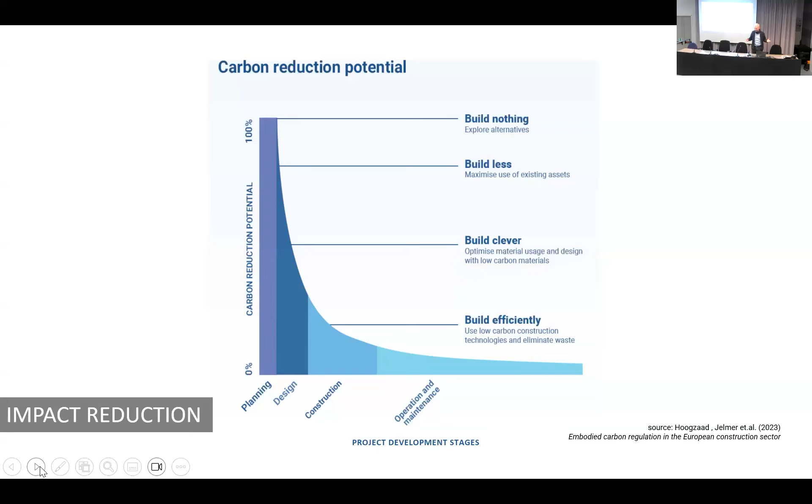The last statement here says, build efficiently and especially use low carbon constructions. And so this brings us into our issue for tonight, because raw earth building is a low carbon solution. But we have some other materials that I will quickly mention. We can perhaps use things considered scraps from other processes. They can be resources for ours. And so we get a bit into the issue of circular economy. I think you're familiar with this. Don't need to speak too much about it.

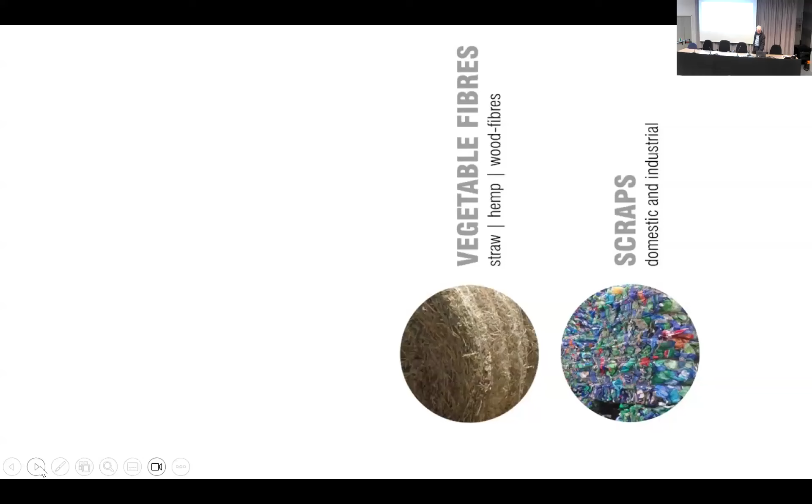But if we go into the realm of natural materials, we can quote vegetable fibers as straw, hemp, or wood fibers that we can use in many different ways. We have vegetable rods. They are different from the fibers. The fibers are very small, and we have to invent solutions to use them, while the vegetable rods can already be considered in some contexts as building elements. We will see this later, so I think Lisa will also talk about this. So bamboo, giant reed, and branches from other woods can be used in this category.

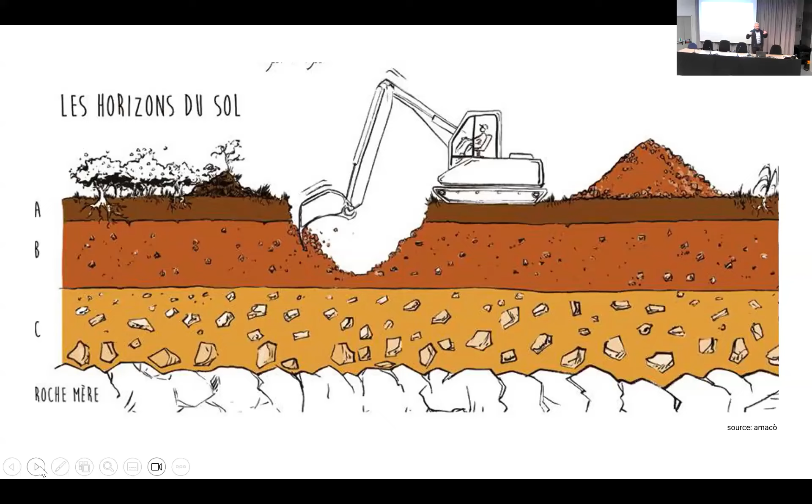And then we have raw earth, and we will see this a bit more in detail. What do I mean when I talk about raw earth? When we source raw earth for building purpose, we normally choose a layer which is underneath the vegetable layer. So the earth that we use to cultivate is the humus layer. This is not suitable for building purpose. We use the second layer. So normally we say between 50 and 60 centimeters below ground.

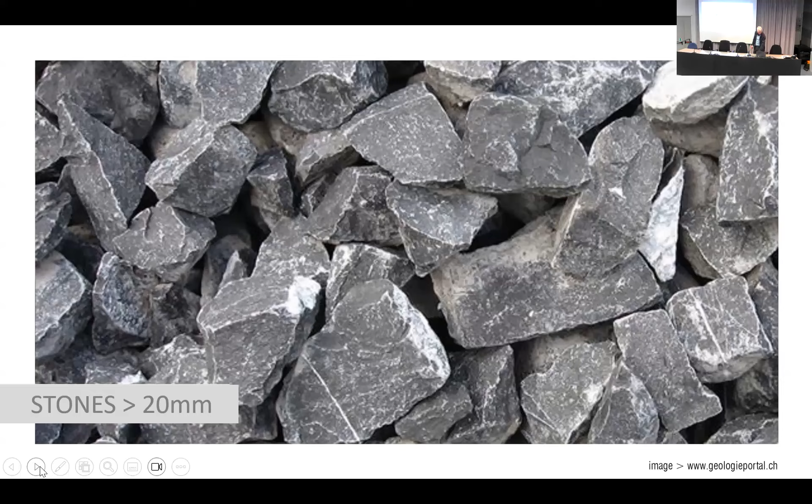And what can we find in this level? We can find stones, and we refer to stones when we talk about mineral products that have a diameter of more than 20 millimeters. So roughly said, these are stones for us. Then we can have gravel. It's a bit the same, but smaller. We can have sand, even smaller. Or we can have silt. This is so small that we can't look at the single grains, but it has its importance in our blend.

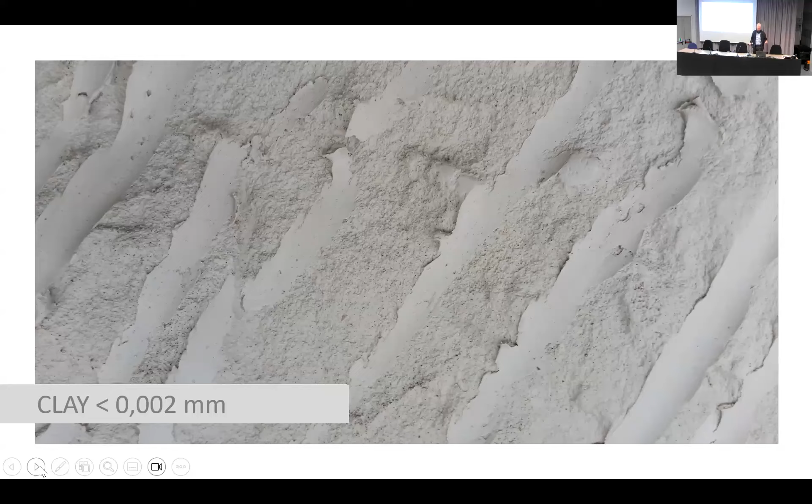And we have clay. The clay particles cannot be seen but by a microscope. They are really, really small. And they have another particularity, which is important to know. I didn't perhaps mention, all of these can be found in earth blends. So all the earths that we will look at tonight will be blends of different shares of these materials. But there's a very important difference. If we look at the first 4 categories, from stones to silt, even if we look with a microscope at silt, we will recognize them as spherical grains. So similar to spheres, not really, but similar.

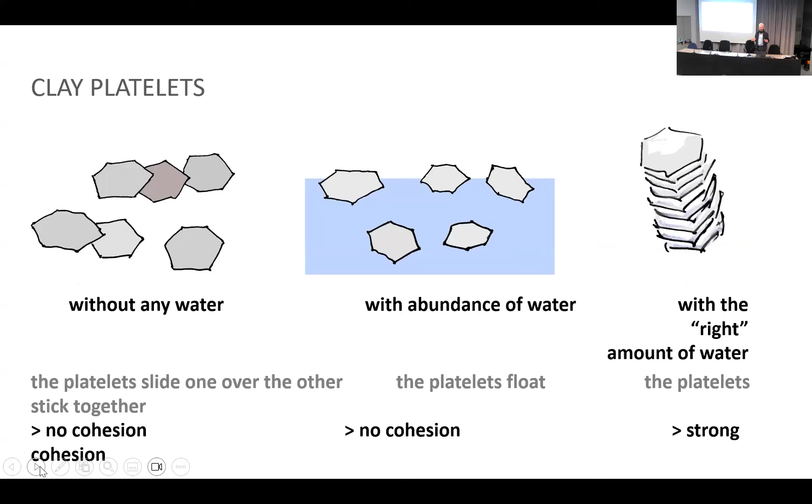Okay, I go ahead, but you can test this, because that's actually the magic of how raw earth works as a material. The important thing is that this cohesion that we have between the clay platelets has the capacity of binding even larger elements. So you can imagine the picture here on the right as 3 little clay platelets that hold a very, very big sand grain, because it's on the microscope. The clay platelets are really very small.

And so this is actually what happens, and what makes raw earth rely on a physical bond. This makes the difference to concrete, for example, where the concrete binders undergo a chemical transformation when they dry, and so they are not reversible, while raw earth can be reversible. I can still add water, and I can re-loosen these bonds, which is a risk because I have to take some care when I build with this, but it's also an opportunity because I can bring the material back to its original shape and start the process from scratch, let's say.

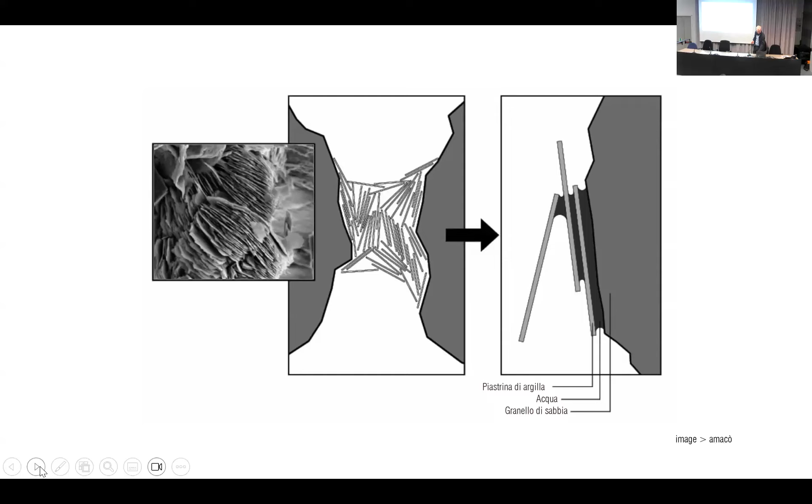So just one more word on how this works. The magic behind this process are capillary bridges. And if you had the platelet, you already felt this a little bit. So what happens? What does the water actually do with these 2 plates? It builds a capillary bridge. Capillary bridge means that the drop of water that I put between the 2 plates wants to have a certain shape, because that's a property that water has. It always wants to minimize the surface where it gets in contact with the air around.

And so if I do exactly the gesture that you are doing with the platelets, so I bring a distance between them, then this shape of water changes, and the tendency of the water is at a certain point to make the process go back, so to bring the two platelets together again, unless, of course, I cut the bond. If I cut too much, then they separate. Is this clear? Yeah? Okay. So I wanted to explain this a bit in detail, because this is actually a very important aspect of building with raw earth.

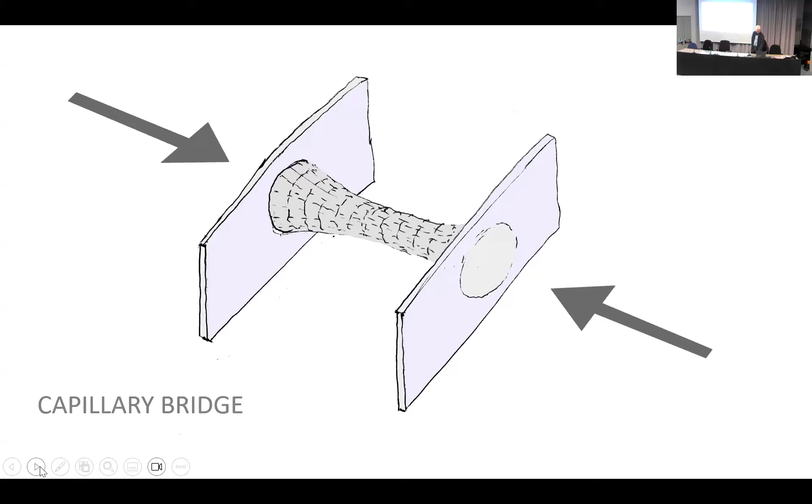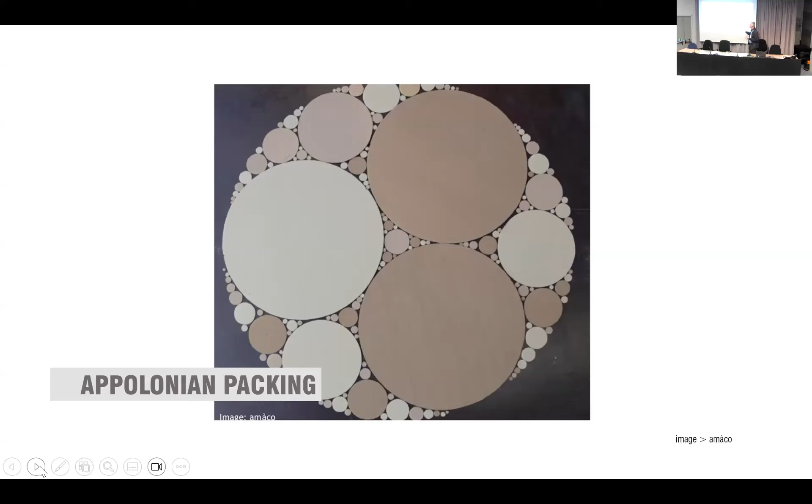It's reversibility. Another important aspect, I already told you about the grain sizes and the fact that raw earth is a blend. And here you can see what it means to have a good blend with many different diameters of grains. This means that we can pack the material. So we can start with large grains. We can close the little holes in between with smaller grains, with even smaller grains, and even smaller and smaller. And this gives a very compact material, okay? So here it is an abstract drawing, so it's very easy to get a really almost closed surface.

What we really have when we source raw earth, actually we can source it from the building ground. That's actually the dream of all raw earth constructors, since we have to build a foundation, we probably have to dig some earth, and we can test this earth. Perhaps it is suitable, then we are lucky enough, and we can use it. Why is it so important to test the earth before starting to build? Because each earth has different properties. The blend that I was talking about can be completely different. It can have a majority of stones, and perhaps there's no sand in it, or I can have a lot of clay and too small an amount of silt and whatever.

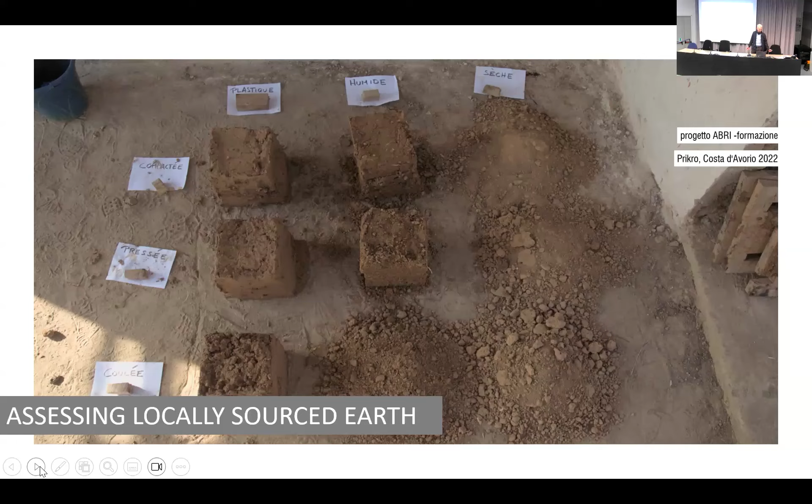So the important thing is really to make an assessment before starting to build. The good news is that there are very empirical and simple methods to do this assessment. The one you see here is called the test of Carazas. This is not important to remember, but it's one of very simple assessment methods. I don't go too deep into this, because otherwise we can talk about everything. The different kinds of earths can be shaped in different ways. And with this diagram, we refer to a classification made by CRAterre. CRAterre is probably the most important research center on raw earth building. Its headquarters is in Grenoble in France.

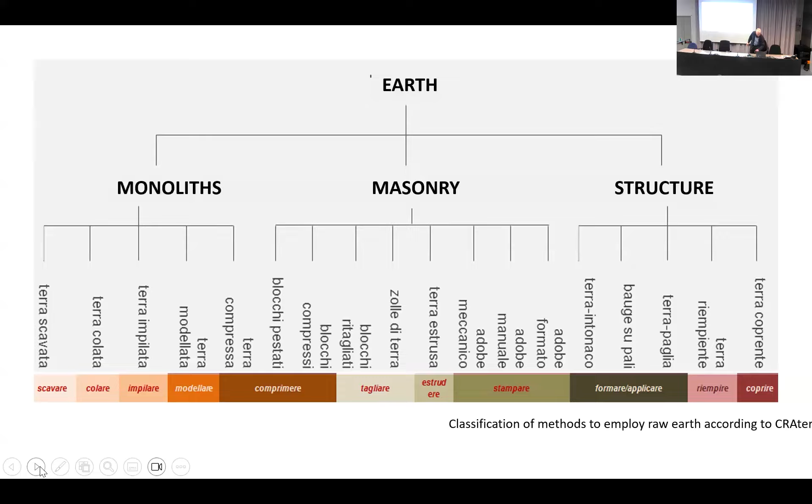And it's not important to go into each building method that they classified. The interesting thing is that they classify them according to the gestures that you do to build. So that's why you have, sorry for the Italian, these verbs here at the bottom. But what we can perhaps have a closer look at is that they can be divided into 3 big families. And we see this here. We have monolithic techniques. We have techniques that we can refer to as masonry, and we have structure.

While the monolithic techniques are those where, if I imagine to drill a hole through the wall, I will always find the same material from the beginning till the end. So in this sense, they are monolithic. Okay. And we can see applications of this. I will go quickly through these; I indicated the countries where these pictures are taken. So here it's Côte d'Ivoire. This is southern Germany.

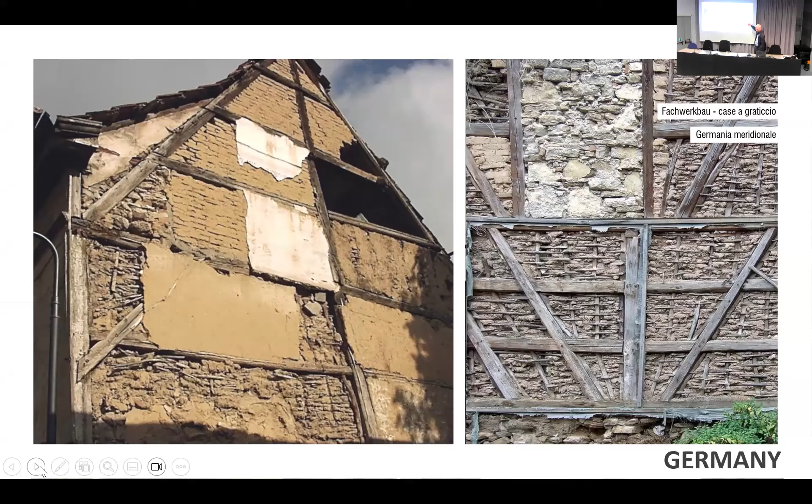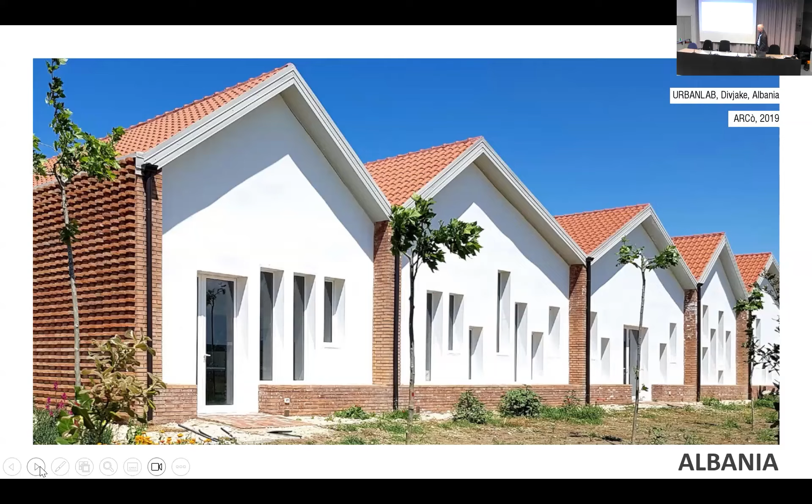But we can have modern buildings. This is the URBANLAB in Divjake in Albania, I don't know if I pronounced it right, by ARCò, an Italian design group. And if you look at a picture from the building site, you see it's made with the same technique. This is a traditional rural house from the early 20th century in central Italy, in the Abruzzo region.

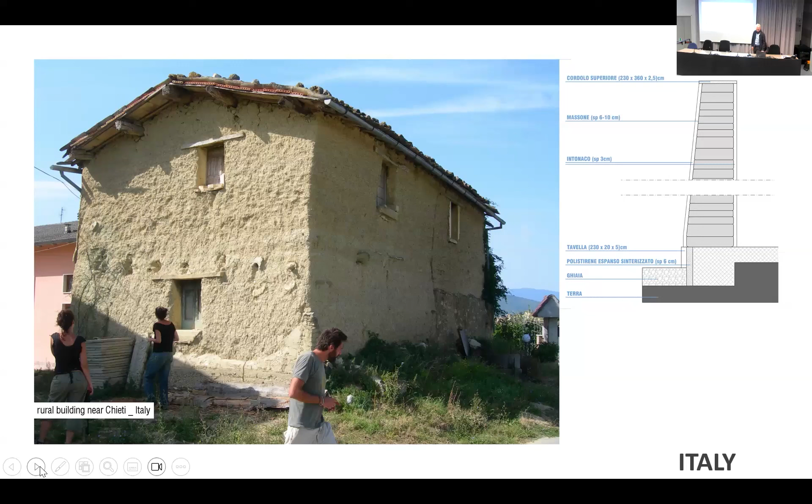When the air in the room becomes very humid, raw earth can absorb this, and so stabilize a bit the inner climate. When it gets dry again, raw earth can give this accumulated water away, and so really have a stabilizing function. The second purpose is acoustic, because it has quite a lot of mass, and so it can divide from one schoolroom to the other. It's a good acoustic insulation.

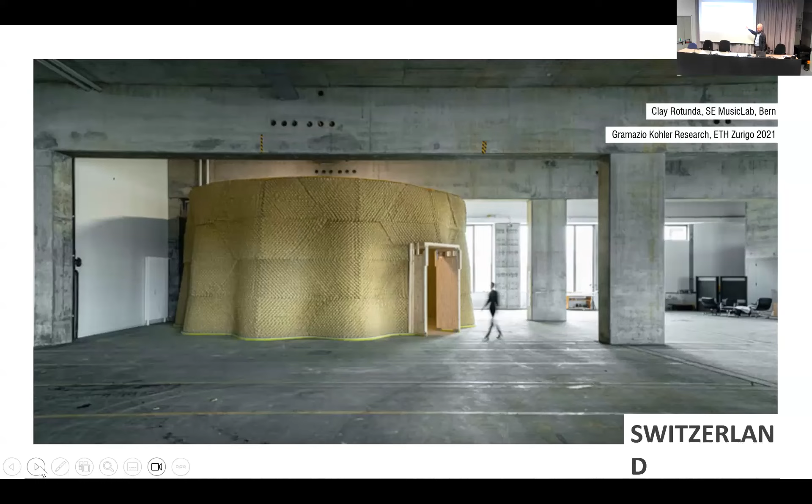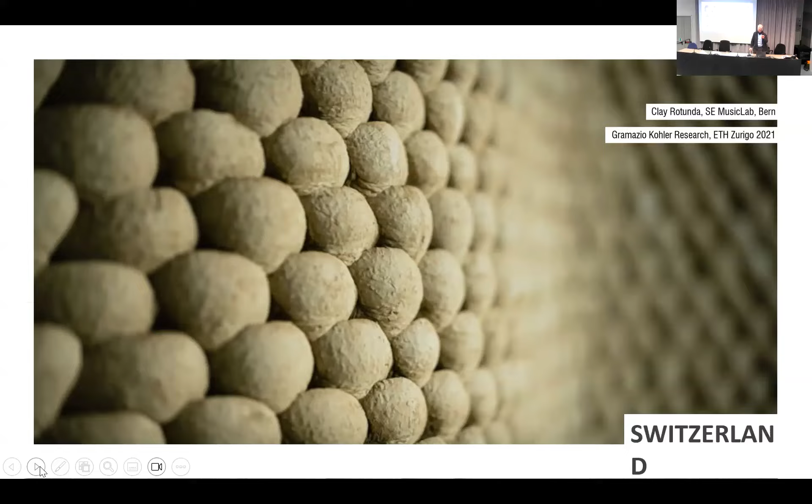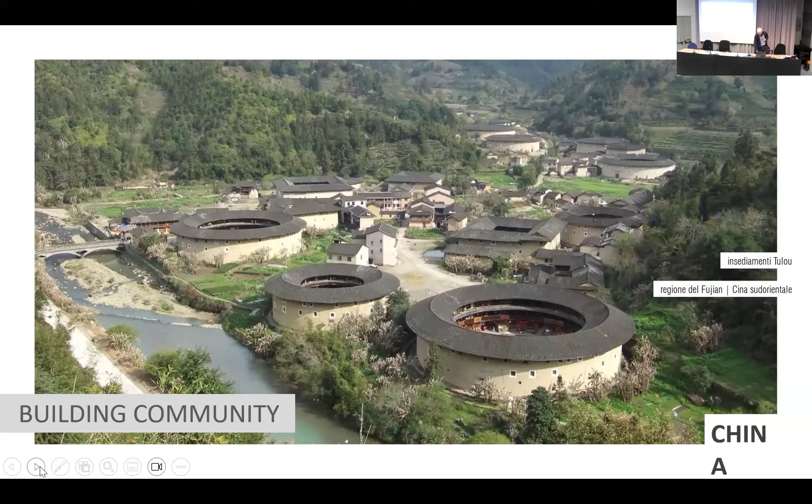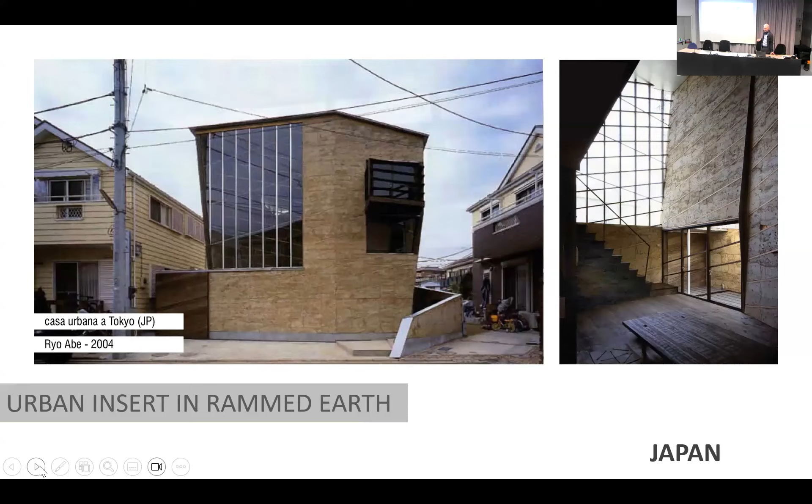But we can have earth buildings in metropolitan areas. Since the issue of tonight is urban building, I wanted to show you this also. And we can have it with a very modern look. This is a private house by Martin Rauch.

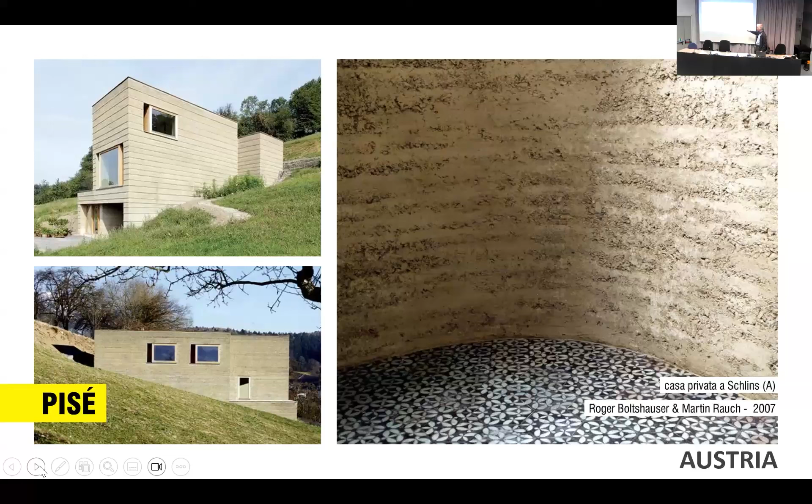Martin Rauch is not an architect, but he is actually a clay maker, and he then got this expertise to make consultancies for architects building with raw earth. And at a certain point, he asked one of these architects he used to collaborate with to design a house for himself, and he wanted it specifically modern with a flat roof, with this square design and so on.

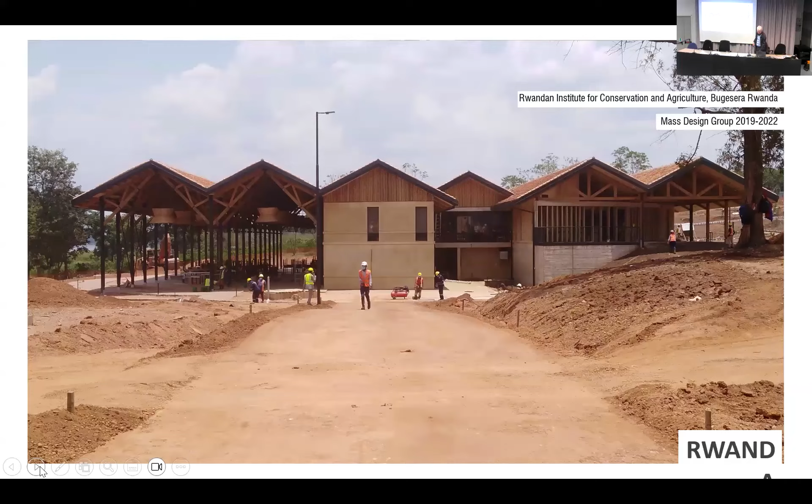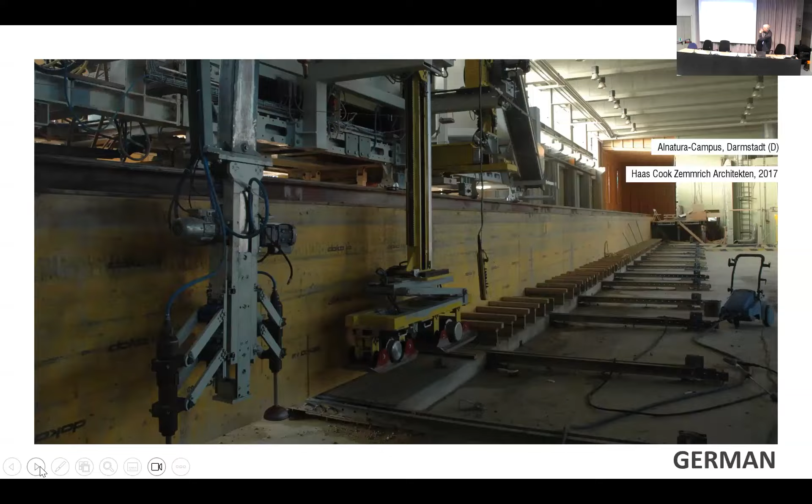The second board is missing, so you have to imagine this with a second yellow board, and then the earth is poured here inside, and these are the rammers. Two rammers like this, and again two rammers like this. And this whole train, imagine it like a train, floats on this system and builds the whole wall. This was important. The architects wanted this because they wanted these lines perfectly aligned. So what they did was actually build the whole wall and then cut it afterwards to be sure that the layers are really precise. Okay.

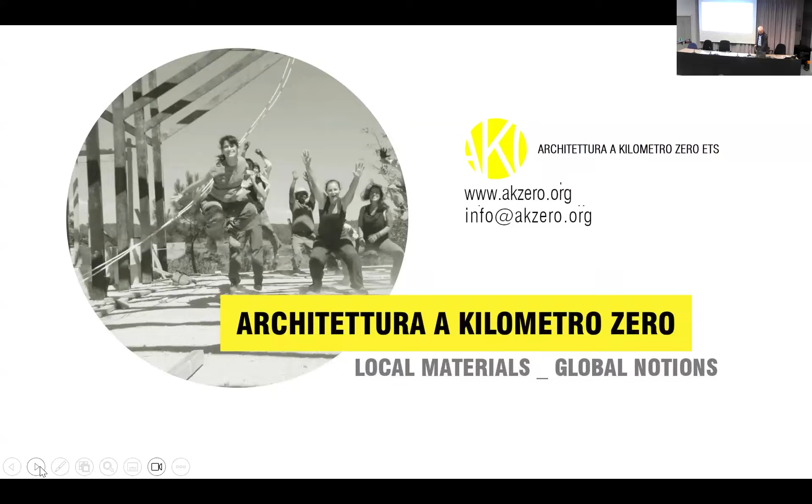Now I switch a little bit. I will spend a few words on the organization I'm part of. It's Architettura a Kilometro Zero, a small organization based in Rome, and I will tell you in a few words what we do. We have mainly three spheres of activity, and we like to call them with these words: build, learn, explore. Where build includes design. We do also design practice, or consultancy. We help other professionals to get their designs done if they need this specific expertise. And sometimes we also construct directly, and I will show you.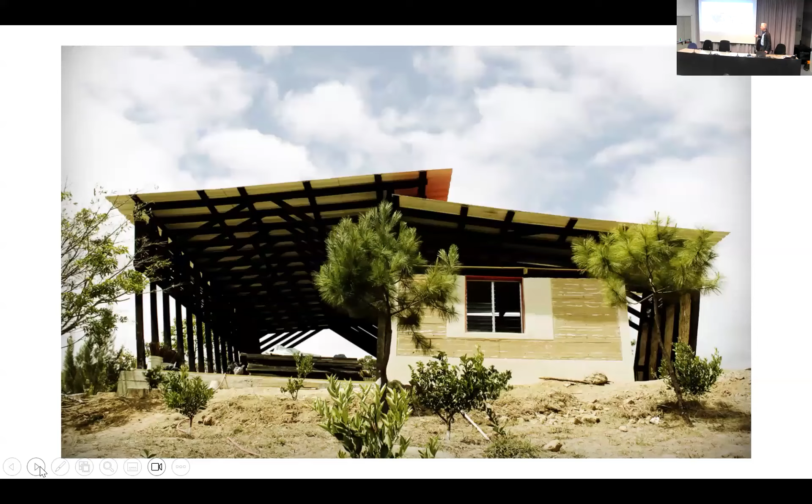This, for example, is a trade school in Guatemala. And here it was important to send a team directly on site, because we wanted to introduce building with raw earth. We thought that this would really make sense in this context, because the material was available. The stakeholders on site could be involved. They could help in the building site, but this only works if there's a presence of people from the design team who also have this expertise. And so it's a process of building together.

This was built in 2021, so we couldn't do that because we couldn't travel at that time due to the coronavirus crisis. And so we tried to do it anyhow with some video conferences on Zoom and telephone, and sending more drawings than we actually had foreseen. But in the end, more or less, it worked.

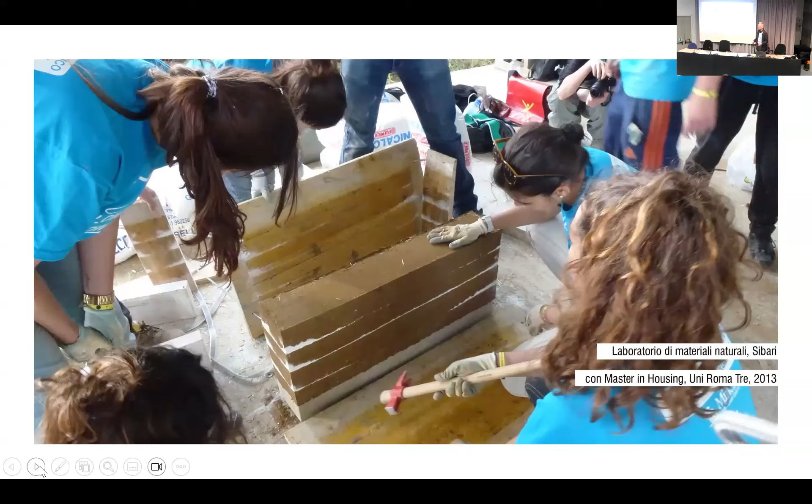And the training is normally a very active training. So it's learning by building, actually, experience. This is what we do mostly. And therefore we have a program, a 3-level program. So the first level is an introduction in the categories of building with vegetable rods like bamboo or giant reed.

And then we have the building with raw earth introduction. This is also building with raw earth, but we keep it separated as render, because this is the most simple application that you can do in a building process. If you don't dare to build a house completely in raw earth, at least you can give it a raw earth render, even in a metropolitan area like the center of Rome. This is possible, and we did it.

And then these are deeper applications, or more detailed courses on the same issues. And then actually the third level experience is the participation in one of these activities. It's more or less what Lisa did with us, spending 3 months in Western Africa.

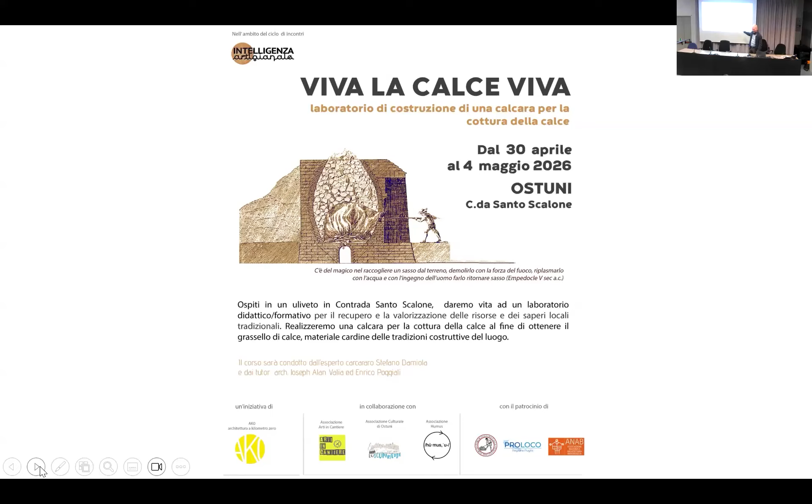And this is an information I got this morning from the organization. This will be the next workshop if someone from the floor here is interested in spending some days in Ostuni, in Puglia, also a very nice place to go to the beach. And this will be on lime, not on raw earth, but it's the next workshop by AK0.

So at a certain point, we tried to apply this workshop concept to Africa, and we had really good experiences with it, because the learning by building process is actually what works. The fact that you share the building site and you do it simply. And in this sense, raw earth is a very forgiving material, because you can easily repair errors. It's perfect for practical training. You can just start where you can, do it. And if it's not perfect, it can be done again. It's not a real problem.

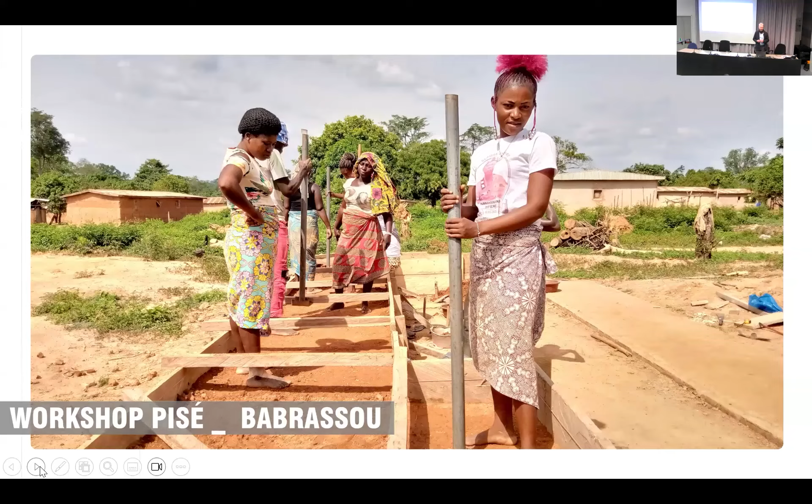In this case, it was the village of Babrassou, where we started such a training workshop. And we were really surprised, because those who participated were mainly women. And we didn't expect this, but it was nice.

Okay, and a few words on the Explore. This is a bit more the research aspects, research and experimentation. This includes very conventional things like energetic assessment of some buildings, where we investigate things like what can come from a raw earth render. Does this really improve the inner climate? Things like that. This is an issue that we are very interested in, prefabrication and self-construction. Can those two aspects go together?

Because self-construction is a very interesting social aspect. It means that those who build their home can bring their own resources, their own human resources into the process, not only in terms of labor, but also in terms of experience and knowing the building. This is something that I consider valuable, should be enhanced. But at the same time, we have to cope with norms. We have to cope with building codes and all of this.

And so perhaps it can be interesting to share the responsibility a bit, to have some part in prefabrication, that till a certain point we have a company that can perhaps build a good timber frame and bring it on the building site, and then we can do the finishes on our own. And so this is a bit behind this.

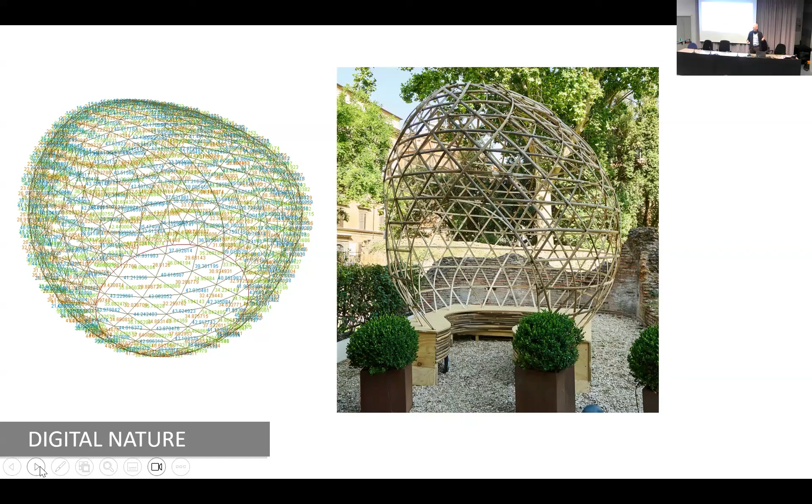Then, just to complete it, one aspect of our research is called digital nature. So here we are trying to understand what we can do if we use digital algorithms to control the design process, but with natural materials which are not homogeneous at all. So sometimes you have these figures that come very cleanly out of the computer software, but then you have to cope with a bamboo rod that has its nodes where it wants and not where we want. So this is sometimes a problem we have to bridge.

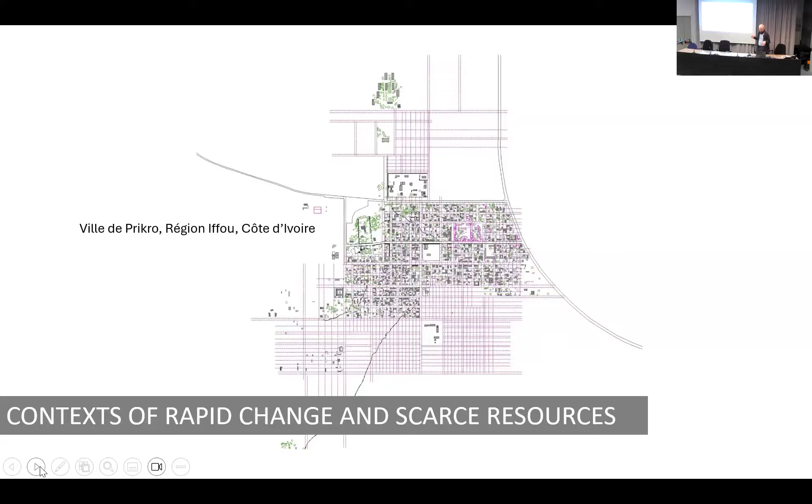Other investigations have a more urban character. This is the city of Prikro in Côte d'Ivoire again. This is a place that Lisa also knows very well. And it's a medium size city in central Côte d'Ivoire. It's more or less 10,000 inhabitants itself, but it's the center for a province of almost 100,000 people. And it's very fast growing, which is actually what is happening in a lot of African towns.

The UN Environment Program estimates that 70% of the African building stock that we expect to have in 2040 still has to be built. So we were interested in understanding how they will build, and whether we can somehow give some little hints, even if it's a process which is ongoing and very fast.

They have bamboo, not cultivations. They have bamboo available, but they have no notion of how to use it because it's not part of their tradition. So this is where an input of know-how can actually perhaps change something.

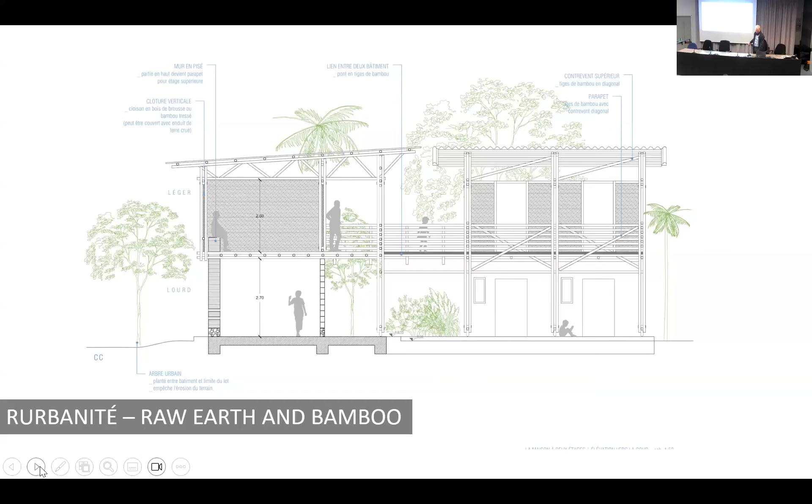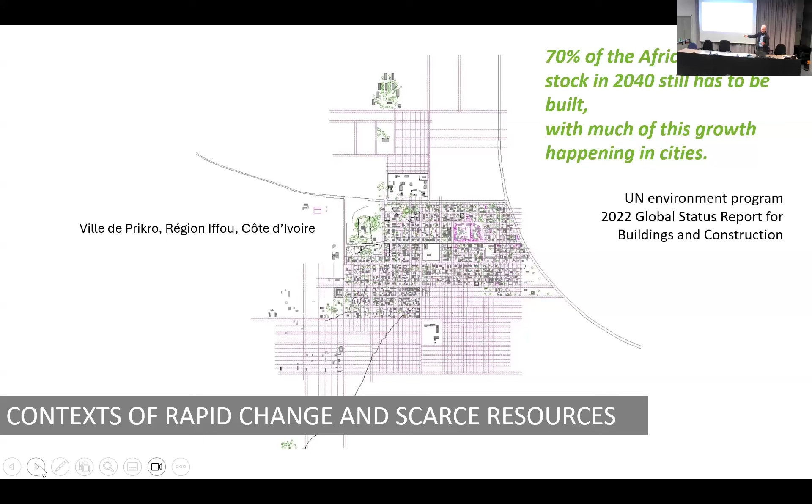I don't want to make this too long, but we then thought about different typologies. Is it only living, or is it living and economic activities like small shops or small workshops? And also how can it grow through the years? If the family grows, perhaps it can grow. And all of this is included in an urban pattern which is existing. I forgot to say this: what you see here are buildings that already exist, but the municipality already drew this endless pattern that goes along, and there will be new plots exactly that way.

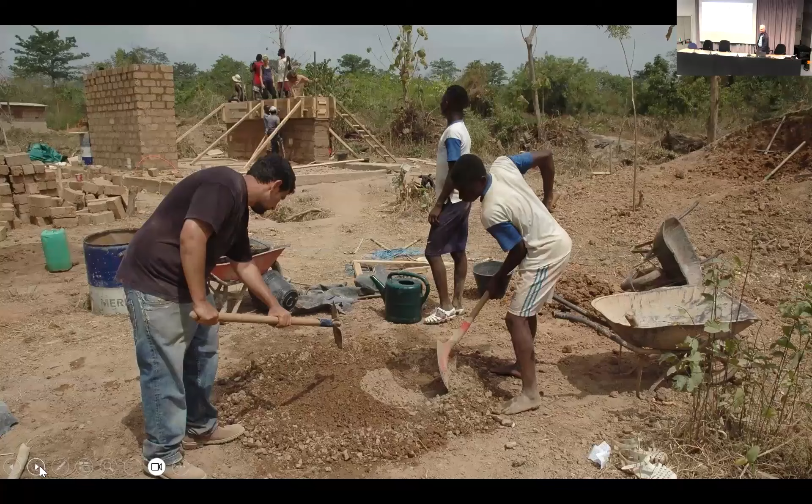So this is exactly what we did later with the program ABRI, which stands for Architecture et Bioconstruction pour l'Environnement Rural Ivoirien. So a specific program tailored for Central Ivory Coast. And we started this with a workshop in collaboration with Roma Tre University. They came to Prikro in 2019. And then this went a long way. You will probably see this photo again.

But this is just to say that the last output of this program is a process that we did in four different sites. So after doing the program in Prikro, which is here, we extended it to four other localities. And our partners on site are an association called Eau et Miel, so water and honey, because they are mainly beekeepers, and they also have this other program aspect with water. But what they needed were buildings for their beekeeping activity. This differs a bit from site to site. Sometimes it's only a place where they can store their equipment. Sometimes it's really a larger building where they can also do training activities.

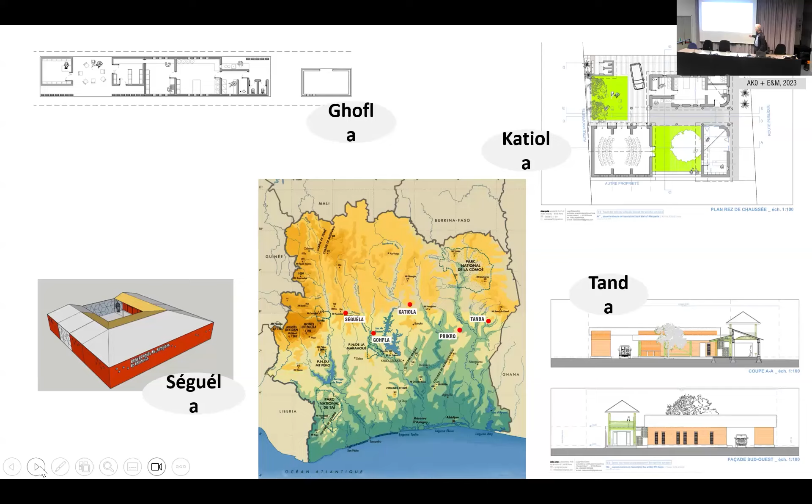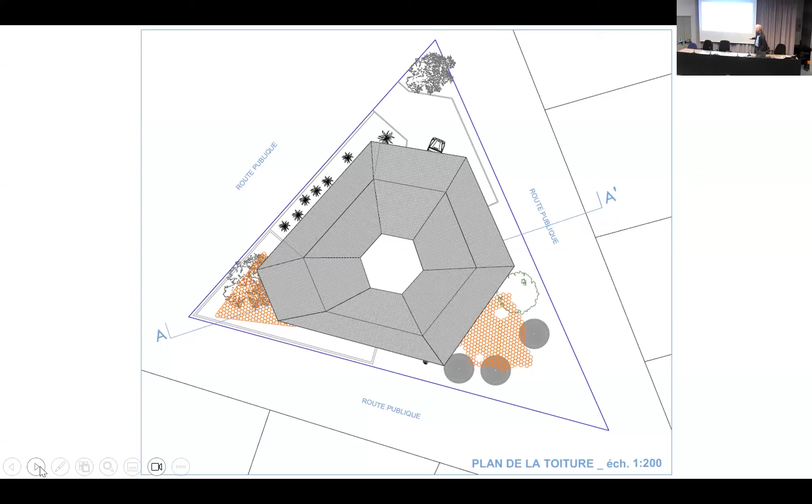And so we had the opportunity through these active building sites to meet the people who will then need these buildings, and to do the design process as a shared and participative process on site. And so I will quickly show you the last proposal. This is in the locality of Tanda. Tanda is here in the very east, close to Ghana. And so here, the design recalls the hexagon, since they are beekeepers, and since the plot was triangular.

And you see it's quite a complex building for the region. We have a training place. We have here the whole processing for beekeeping, so where the honey enters from outside, and then how it is processed until it is sold in a small shop, which is also a little cafe. So this also has this urban aspect. And this has now been presented to the municipality of Tanda, and we're waiting to do this.

And meanwhile, we have to see how we can finance it, because this is not 100% clear still, but as usual. But this is something we always managed, so I'm positive on this.

So, this is perhaps a good point to pass the floor to Lisa, because she actually will present you an experience which is very similar, because the client, if I can say it so, is the same. It's the organization E&M, and the site is different, you will tell, and also what the building will be used for is different. But here I will stop and pass the floor to you.

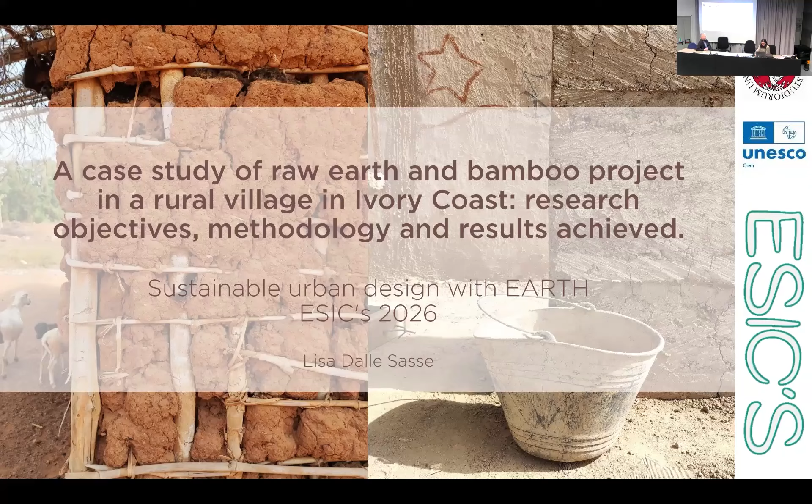Now I work at Forwood, a bioarchitecture company in Belluno that builds natural, energy-efficient wooden houses. I work in the technical office, where I handle cost estimates, drafting, but also drawing and design. These are two photos. The first one is a private building that we made in Cortina with CLT wood and also reclaimed wood. And the second one is our office that we built with a timber frame structure.

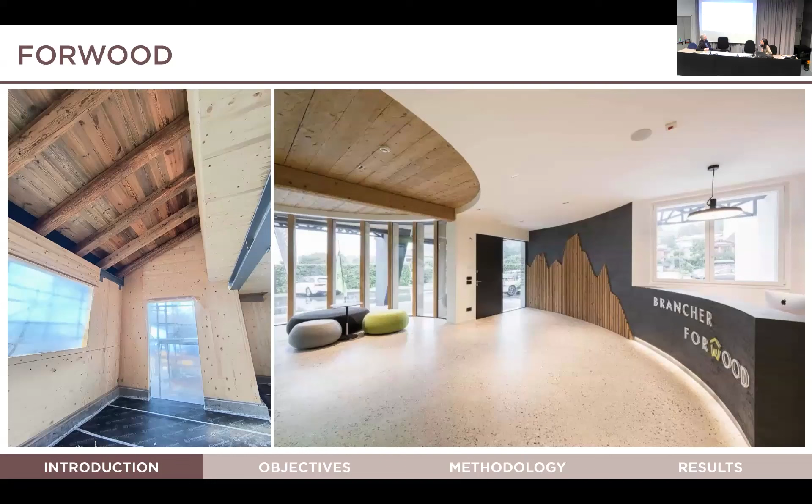I developed my thesis through the Talete Honors Program, a training track parallel to my degree program focused on global interdependence and international cooperation. The program is structured around two central experiences: the field research for the thesis, which I did in Prikro in Ivory Coast between January and April 2022, and the postgraduate internship, which I completed in an architectural firm in Verona, specializing in the use of wood and straw.

My thesis was supported by AK0, the association of Stefan, the local association E&M, founded in 2001 to improve working, living, and environmental conditions in rural African areas, and also Bamboo Strutturale, a research team for the more technical aspects related to bamboo as a material.

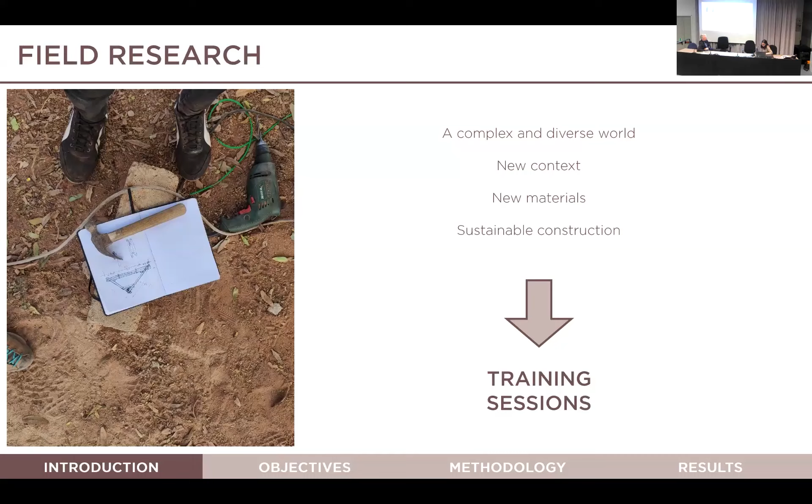The entire process of this thesis allowed me to explore a new context, new material, and understand the value of natural material, also participatory design and respect for the environment. In fact, during my stay, there were a lot of training sessions aimed at raising awareness among the local population and young builders who, like me, want to follow the path of ecological construction.

The field research was also an exercise of reciprocity, because the people involved established a relationship of mutual learning, in which everyone could give but also receive, despite differences in role, age, and culture. The research also made it possible to understand the needs, the available resources, the skills of local builders, traditional techniques, traditional construction, and also the feasibility of the new project, all through a participatory approach. This method improved the quality of the design by bringing together different skills, expertise, and experiences, and involving the end users themselves among all the stakeholders.

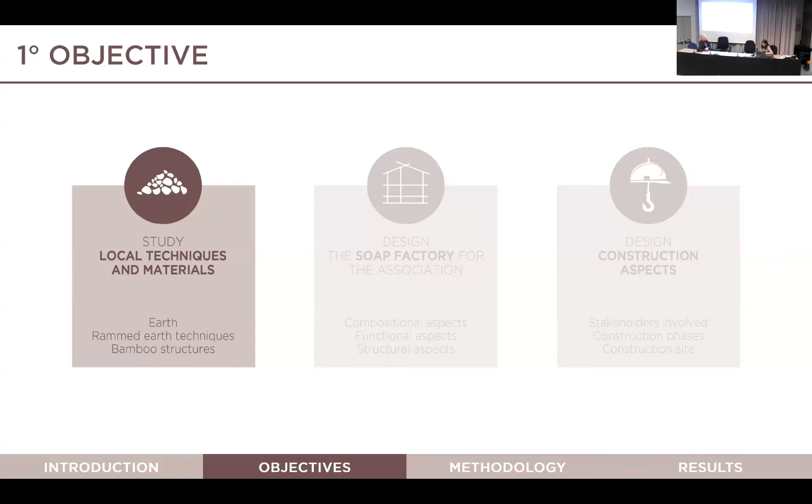The first goal of the research was to explore local techniques and materials in order to select the most suitable ones to use in the project. It was made possible thanks to the assistance of the local association and young builders, with whom I conducted site visits, studied earth and its properties as a building material, and investigated traditional materials and construction methods.

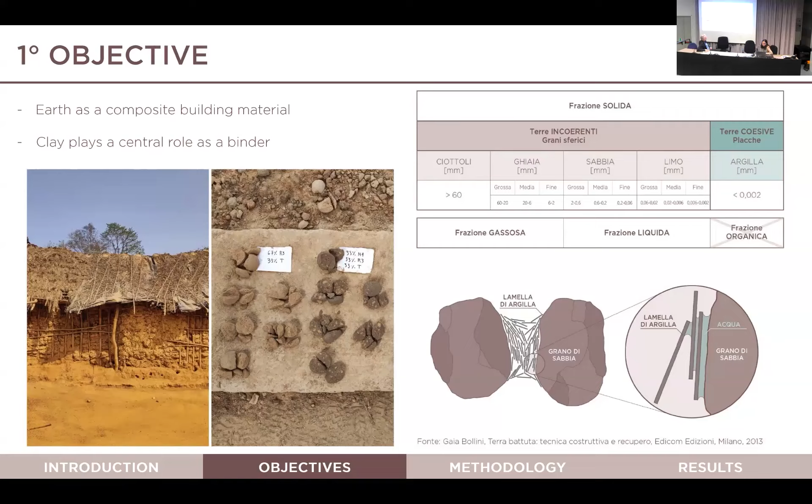Like Stefan already said, I understood that soil is a composite material, so it can be very different from one to another. To determine if the soil is adaptable to construction, there are some empirical tests we can perform. There are many, like the ball test, the Carazas test, and others.

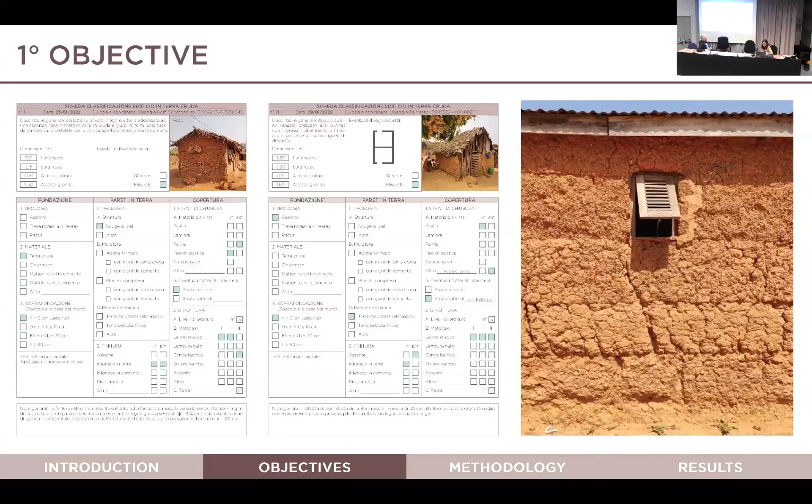These are some sheets I made to classify local buildings, while these are the most common types of construction that I saw in Ivory Coast: molded earth, or bauge in French, compressed blocks, adobe bricks, mud on poles, and bamboo cladding.

The second goal, the central goal of the research, was to design a sustainable low-impact project that could be realized with local human resources. The project concerned a center for resources and artisanal soap production of the Eau et Miel association in Djebonoua, a rural village in the center of Ivory Coast. I studied compositional, functional, but also structural aspects of the project.

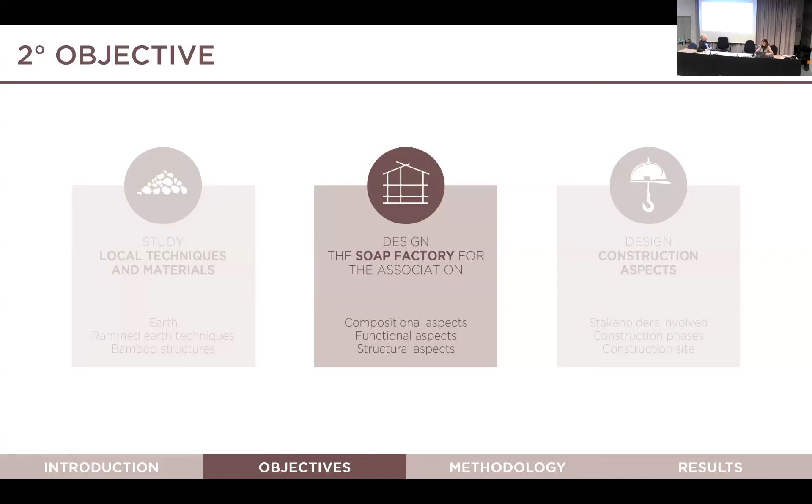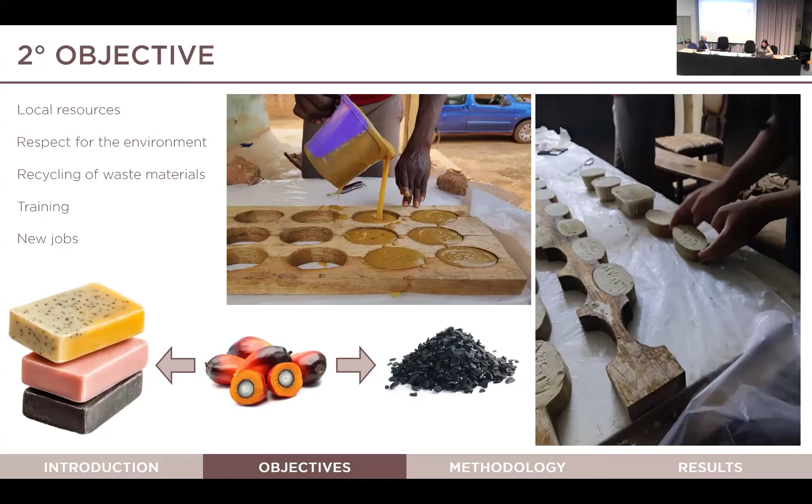For the local association, this project represented an important step toward environmental protection, the recycling of waste material, and also training to create new jobs for the local population.

The last goal, the third goal, however, was to analyze the project's practical feasibility. So the construction was organized into phases that were simple and flexible, to adapt the project to changing needs and financial constraints, and to allow the building to begin operation without waiting for the end of the construction.

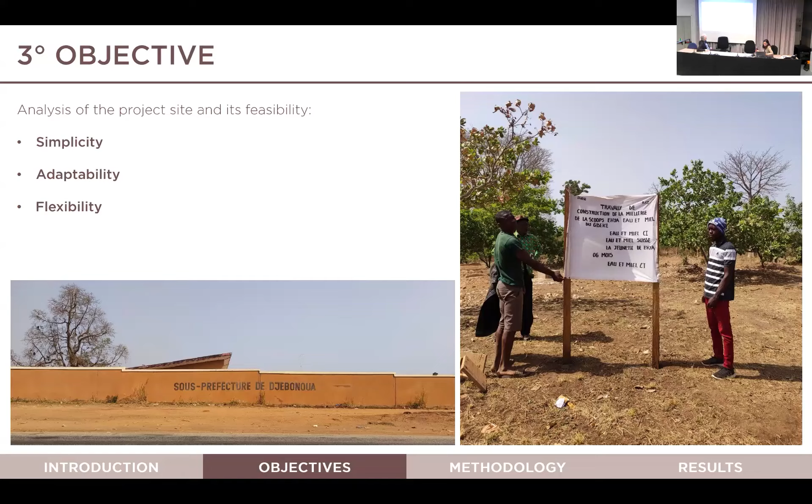The methodology of this research was organized as follows. The first step involved researching and reading reference texts on materials, but also on the African context. And then I participated in a workshop organized by Akù in Benevento, focused on traditional and prefabricated rammed earth, which was really useful for learning the construction technique and also for beginning to work with raw earth.

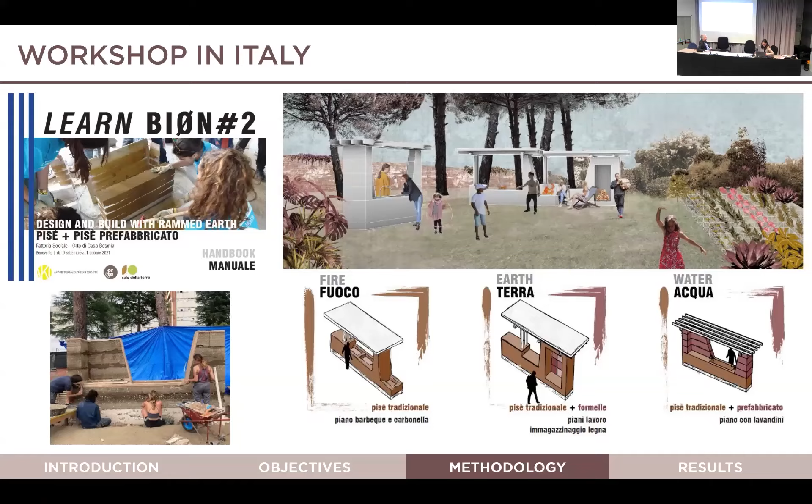Then I left for Ivory Coast to conduct the field research of my thesis. During this phase, we organized a training session with Akù for local builders on the use of sustainable and eco-friendly construction techniques. At a small training site, we built full-scale prototypes to explore the use of rammed earth, bamboo, and wood as building materials, given their great potential.

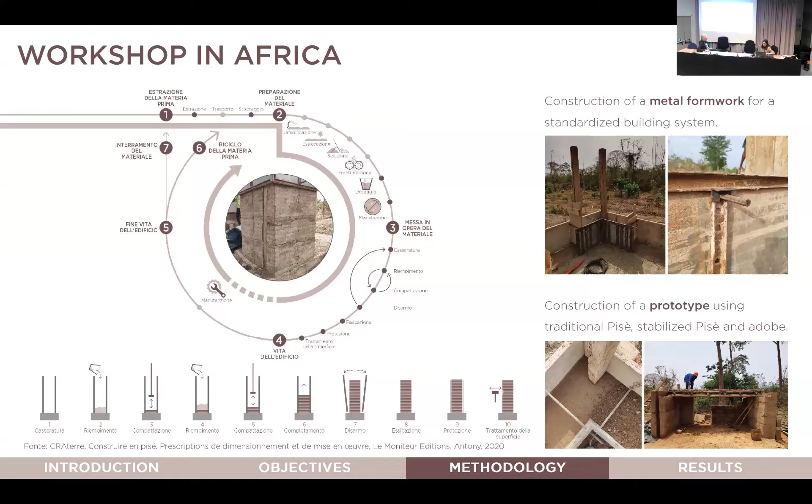The pisé technique was studied by conducting tests with a young local builder to understand the soil, then designing and constructing a metal formwork for a standardized construction system, and then building a prototype with a wall made of traditional pisé, stabilized pisé, and also adobe bricks. These are some photos of the formwork on the top, and then the prototype made with rammed earth.

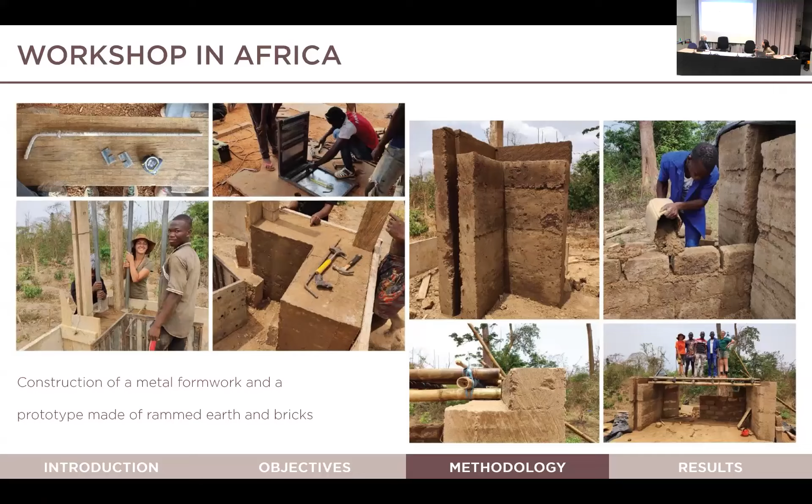I also conducted some studies on bamboo, an eco-friendly and sustainable material that is rapidly renewable and also has excellent physical and mechanical properties. In the field, we worked with local builders to construct a bamboo truss and a section of bamboo and earth floor. This prototype helped us gain a better understanding of the material, but also its workability.

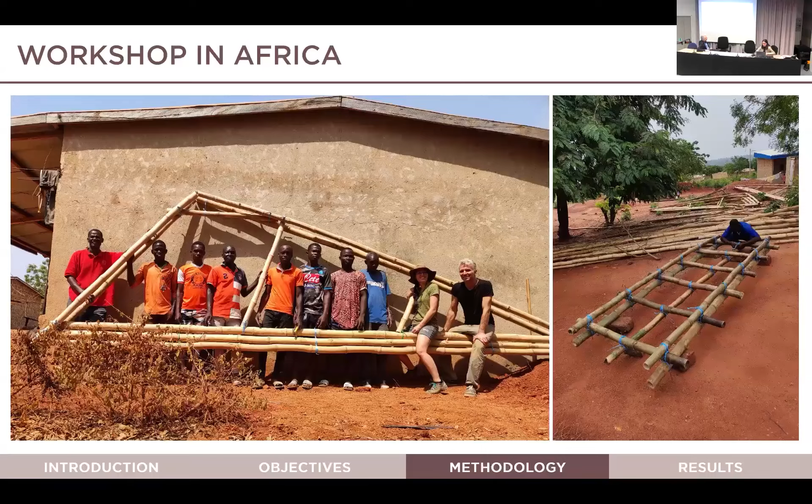This is the truss we made with Stefan. And then the small floor made with bamboo, and then the other steps of the prototypes with the earth. We also considered the fragility of this material, which is easily attacked by fungi and also insects. So we decided to design and build together an earth brick fireplace to treat this material with fumigation, which increases its durability.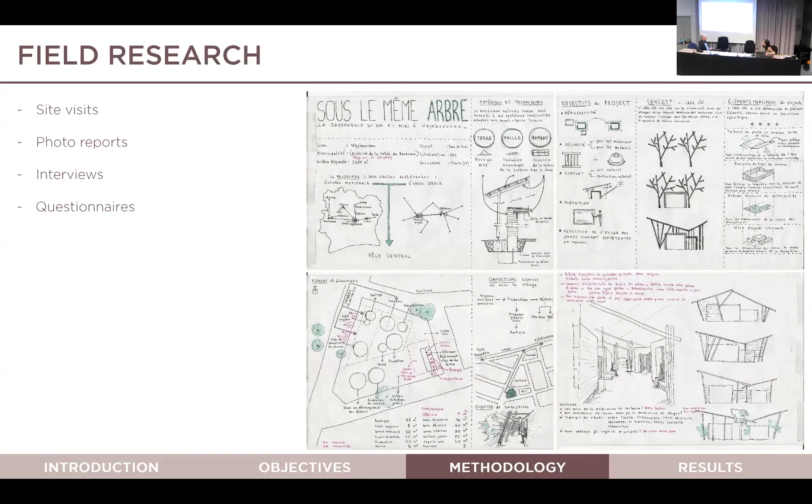Then, after gathering all the information on the material and the techniques, I drew up some plans that I showed to the association representatives to discuss the various design issues that had emerged in the field research. Once the field research was completed, I conducted a literature review, and then I synthesized the collected information, maintaining close communication with the local association. Finally, I created a connection with some bamboo stalks to test its feasibility and also the replicability of the system.

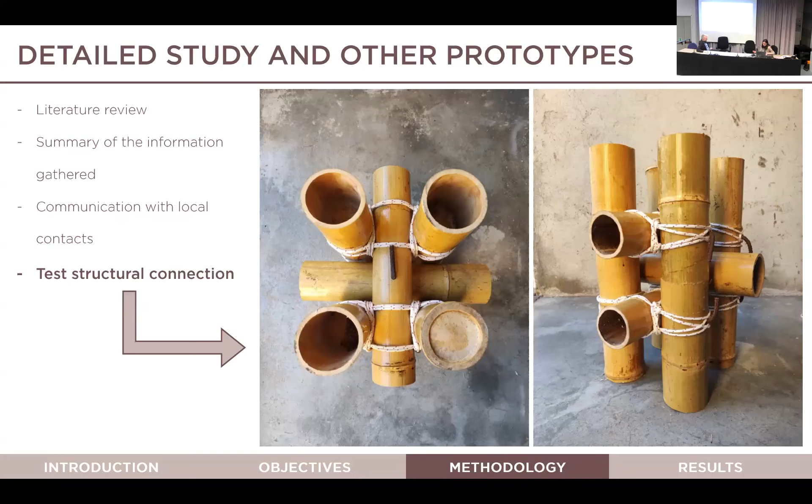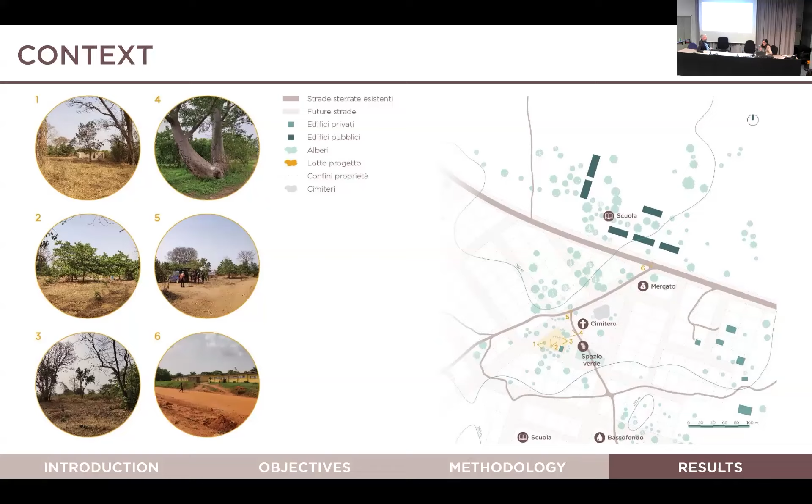Let's talk about the results. First of all, I studied the project site located in Jebonois, through visits, photographic reports, soil tests, discussions with the local builders and the residents, and by giving some questionnaires, which offered a different way of experiencing the space.

Then I identified the main objectives of this project, and I grouped them into 3 categories: the work, the community, and also the construction technology. The most important goals are replicability of the project, but also the comfort of the spaces, the creation of new skills and jobs. But the central goal for the association OML is to reduce the exodus of young people to cities and Europe.

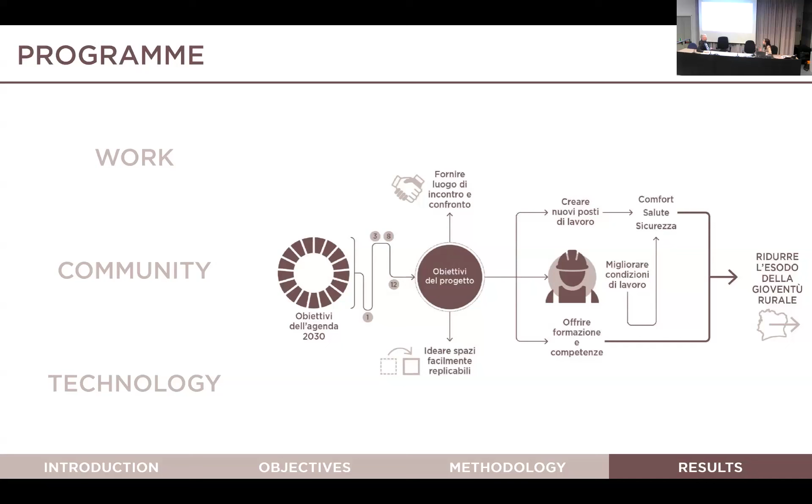After studying the soap production chain, thanks to the creation of a prototype with an expert, it was possible to understand which activities will be done in the 4 main areas of the complex: the research area, production area, waste management, and sales. Specifically, the soap production in Jebonois will be made with palm oil, coconut oil, and honey. And the waste from this production will be reused to produce vegetable charcoal in the center.

Then I analyzed the production flow to better understand the quantity and the direction of the materials in the center. This allowed for a clearer definition of the spaces, their dimensions, but also the connection between the different areas.

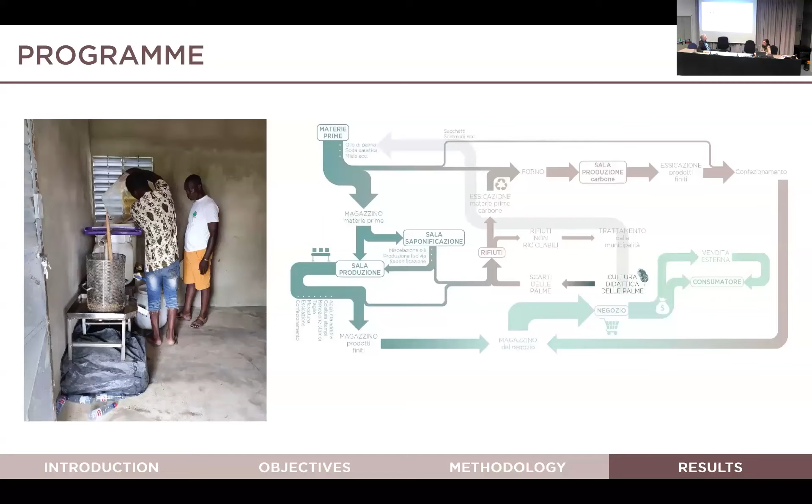The concept for the project emerged from observing how many people spend more time outdoors than indoors, often treating the trees like they were real rooms. So we decided to create a sort of bamboo forest that embraces the production spaces, which are instead designed using rammed earth. The result is a shell that protects the rammed earth both during construction and throughout the building's lifespan.

This shell in bamboo also collects rainwater, allowed natural ventilation and cooling, and at the same time managed to create covered spaces, but also open. The master plan reflects the intention to create a new permeable square with buffer zones that preserve the existing vegetation and pedestrian areas that are connected to the factory.

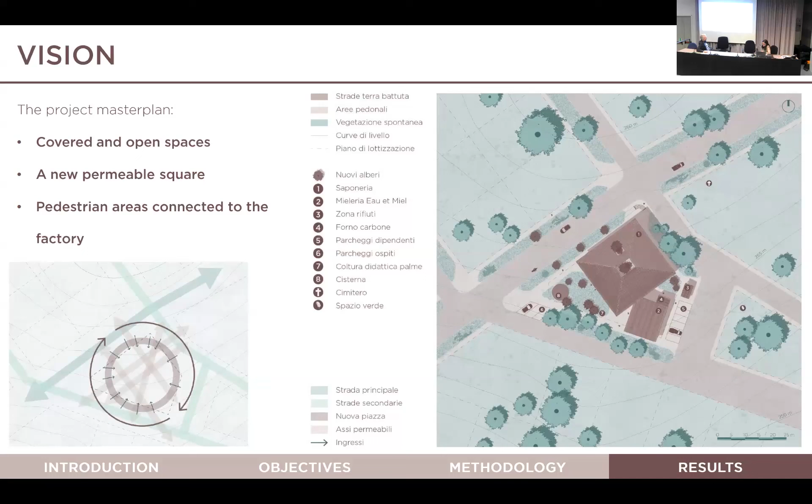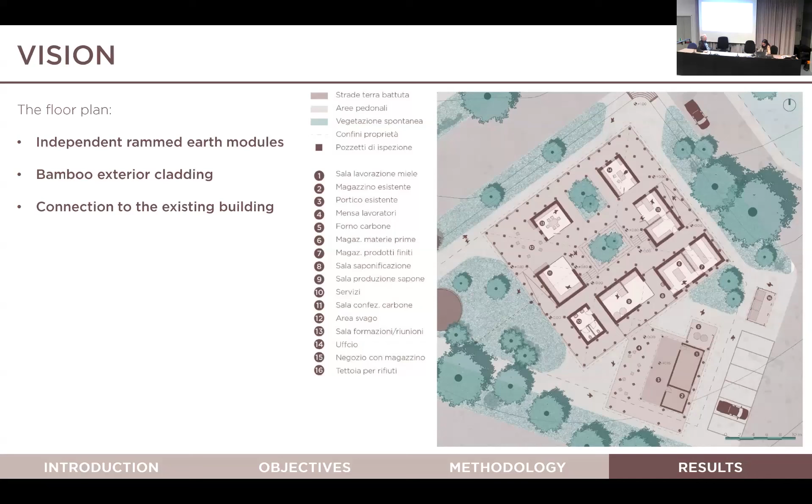The pisé modules with production, retail, training, but also meeting spaces are independent, while the external bamboo structure is a single large complex. The center has also some versatile areas that the association wants to use for training sessions, for awareness raising activities on topics such as recycling and sustainability. The waterproof layer on the exterior structure in bamboo consists of a lightweight recyclable vegetal sheet that is made with leaves, and it's called papo.

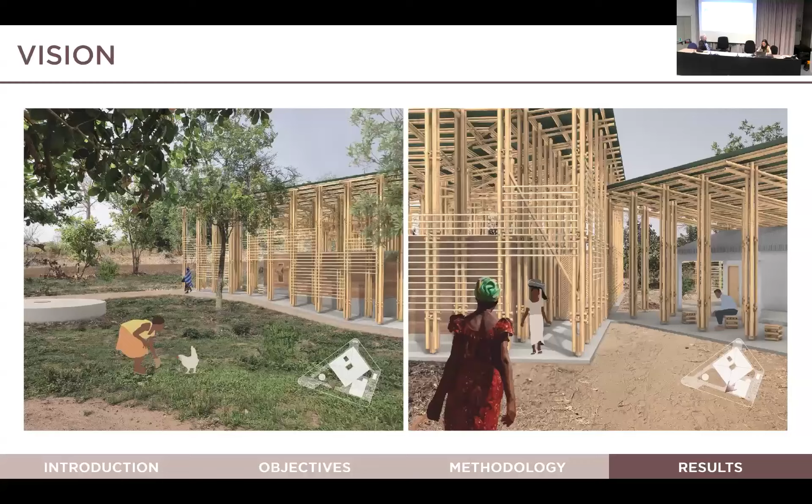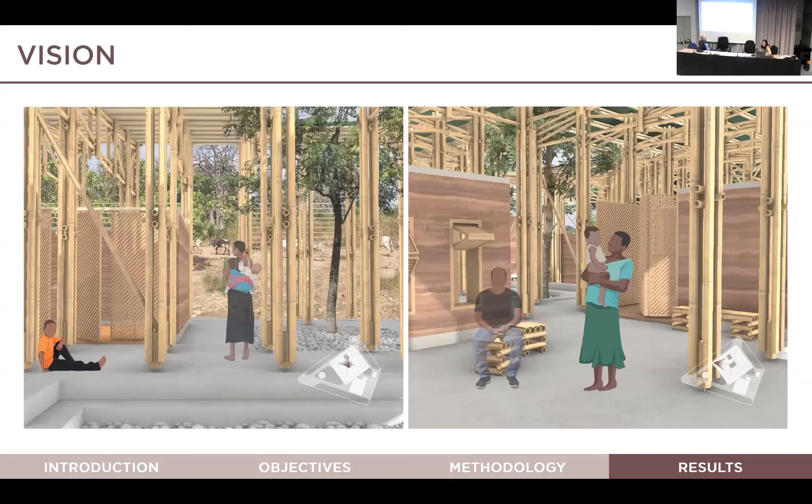These renderings help us to visualize how the structure fits into the local landscape. We see the exterior structure in bamboo, but also the walls in rammed earth. The interior furniture was designed to be made by some bamboo processing waste. And then the rotating door makes the space more flexible. The two design systems, so the bamboo envelope and the rammed earth walls, work together.

In fact, the walls help to wind brace the external structure in bamboo, which consists in a single building with a central rectangular courtyard. So for the structural analysis of this envelope, one of these trusses was chosen as the model for the analysis. Then we made two calculation tests for the compressive instability, because this is an important phenomenon to consider when we design a bamboo structure, because bamboo pole is particularly slender and imperfect. So these are factors that can compromise the stability of the structure.

Then in conclusion, I think this experience was a wonderful challenge. The field results made me work out many studies, but also practical experiments. I've learned a lot from the people I met, and I figured out which field interests me the most. Thank you.

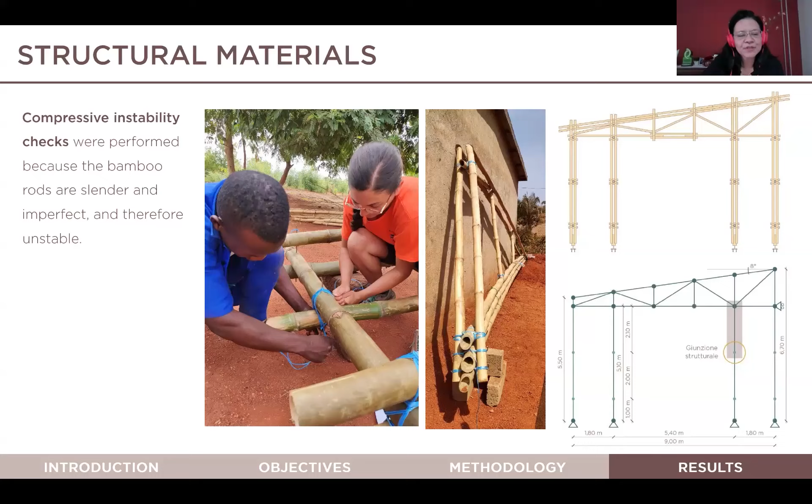Hi, hello everyone. Are you listening to me? Yes. Oh, congratulations on your presentation. I'm Katia, professor in Brazil who works with sanitation infrastructure, especially water security, governance, and climate change, a topic on which I will present some experience in Trento in May.

Stefan, you addressed a relevant and contemporary theme that we need to pay close attention to going forward, revising our quality of life standards and the low impact technologies to prosper more independently of natural resources. And in this sense, I would like to know about the financial investments needed to implement such an experience and thus encourage the construction of projects of this nature on a large scale. Is it possible to estimate the cost, for example, per square meter in euros or dollars for these constructions by type of material, and how long on average these projects might take?

And the reason I'm asking is because I worked as an advisor in different municipalities in Brazil, in the state of São Paulo and in the Amazon region. And the time and the cost of constructions are the first parameters that public managers consider important rather than longer-term benefits. Could you provide us an average value and a time estimate for these projects? Thank you. Okay. Thank you for the question, because it gives me the opportunity to say a few things that I forgot before, or that the time was not there.